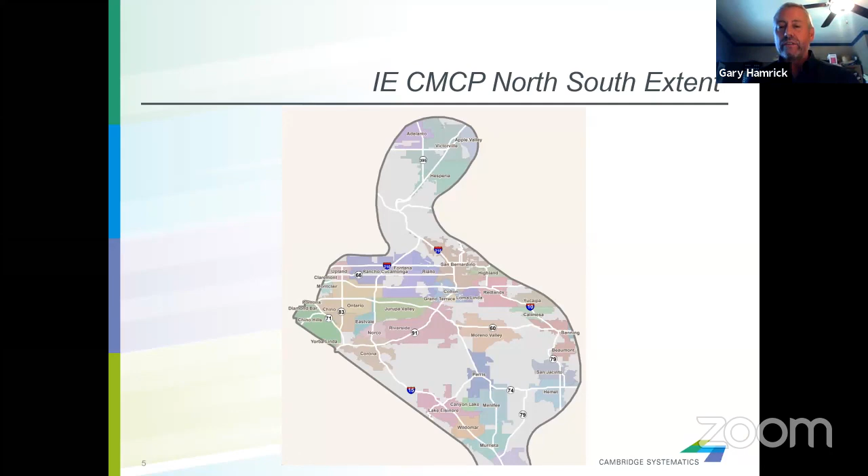So when we originally envisioned this project, it was essentially, as Jillian said, all of the Inland Empire, excluding the Coachella Valley for the most part, and some other areas to the north. This is the original north-south extent. This is the original east-west extent.

As we got into looking at this in a technical level, we realized that these areas are so vast, the corridors are so long, and the issues are so specific to the local area that we really couldn't do a deep enough dive. So we went to 10 subcorridors. We have 5 north-south subcorridors and 5 east-west subcorridors.

So this is the same area, but we're breaking it down now into localized corridors where we can really talk about the issues of all of your cities, of the specific communities, of the specific freeways and arterials.

And we've named these corridors not by a freeway name. For example, the I-215 corridor, we've named it how people travel. So from one area in the Inland Empire to another area that people like to go from work to home, or they go to school in another area. We've identified sort of the trip patterns and how people want to get around.

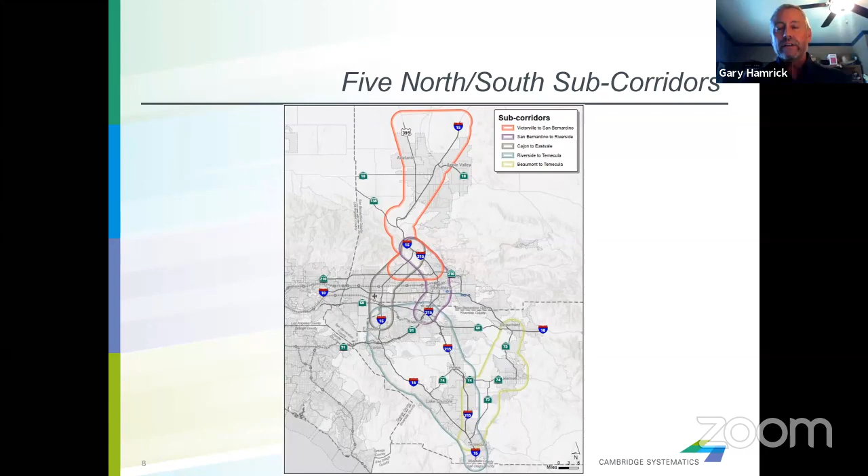Now, this is not being done in a vacuum where staff and consultants go in a back room and do some work. It's very important to have a robust stakeholder engagement process that's written into the CTC guidelines. So we did that. We had a project committee consisting of all the agencies here, including RCTC, of course.

And then in Riverside, we had a unique situation where RCTC had recently done the Reboot My Commute effort. And there's a tremendous amount of public feedback on what the public thinks about transportation issues, problems out there today, what kind of solutions they'd like to see. So rather than going out and giving them another survey and confusing them, we really utilized that information, which was fresh, good information about what the public thinks about transportation in Riverside.

For the technical analysis, this covers just some of the many different characteristics and data points that we looked at. So demographic and land use. What are the areas actually, what are the characteristics of these corridors? How do people move around? What are the trip characteristics? What kinds of trips, trip lengths?

Safety, where are the collisions occurring and where are concentrations of collisions? Active transportation, how can we improve biking and walking? And then of course, looking at freeway, arterial, transit, and freight. So again, the word multimodal is very important. This is not your old freeway plan where we simply look at what is the level of service on the freeway and do we add lanes. It's really about all modes.

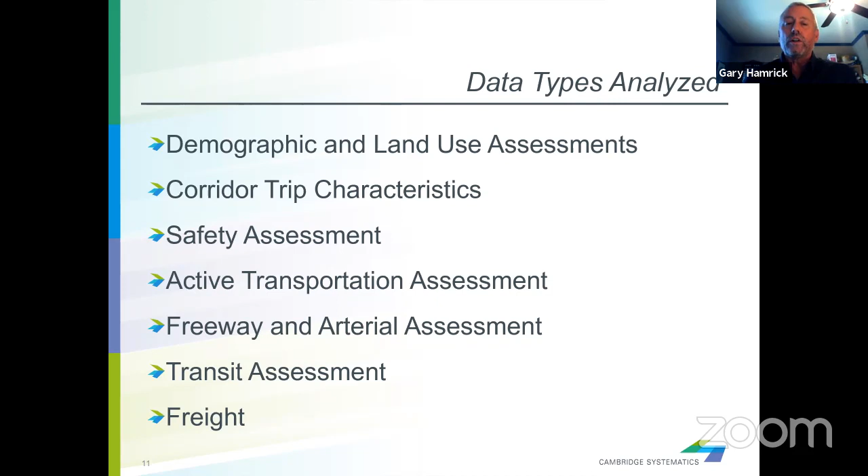Some of the data, just as an example, population density. Where you have more density, you have different issues associated with transportation and how people get around and make their trips. We analyze this for the entire region as well as the subcorridors. Without going into detail, you can see the red areas are the areas of higher population density, in this case a north-south corridor. We're finding along I-210, I-10, and SR91 concentrations of higher density, for example.

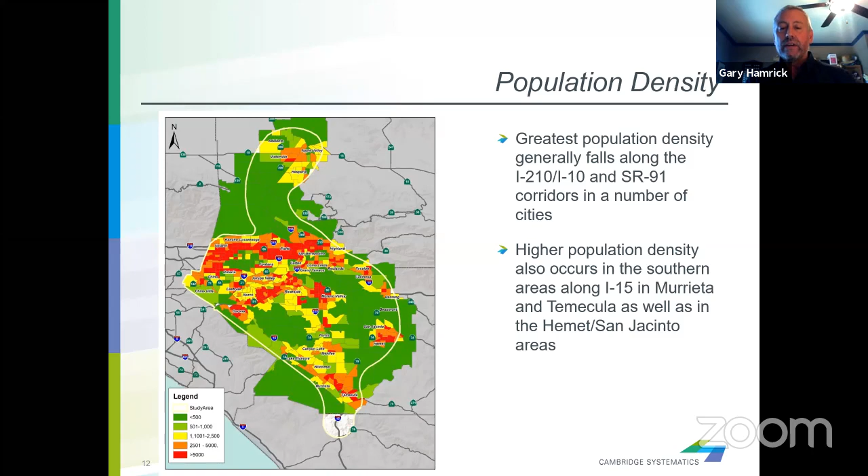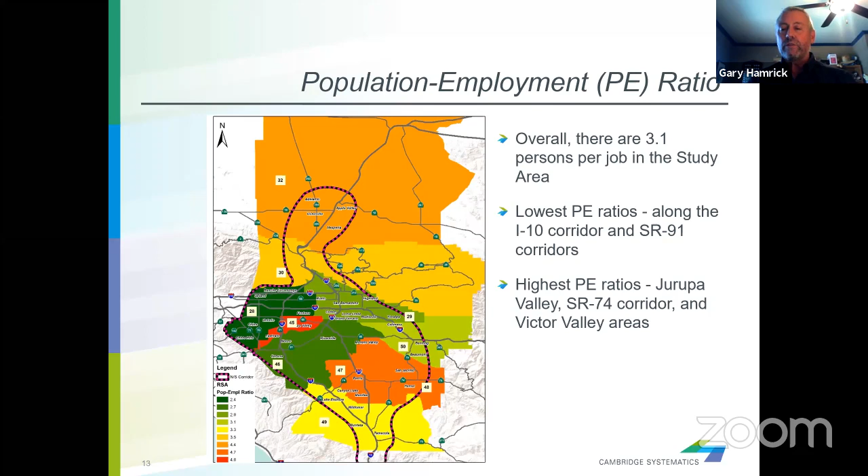Another way to look at it is population to employment ratio. So if you have a lot of people and fewer jobs, people are going to have to commute longer distances to get to their place of employment. And that directly relates to the kinds of improvements for transportation that we look at for each individual area.

I mentioned we looked at safety and collisions. We looked at each freeway and how it compares to the countywide average and the Caltrans District 8 average. We found that SR91 in both directions, I-215 southbound, and I-10 eastbound are the freeways with the highest collision rates. That directly relates to the kinds of improvements we want to look at for those freeways, not only to solve congestion but also to solve some of the safety issues where you see a lot of incidents occurring.

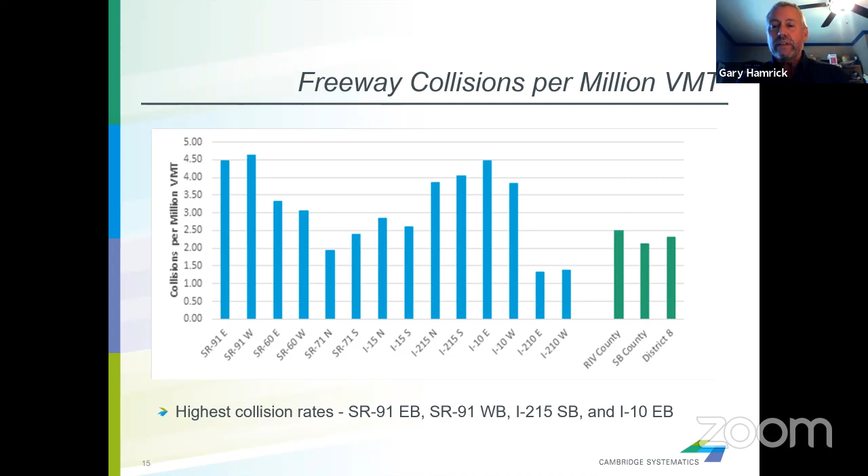So then we did a deeper dive down to the individual subcorridors, and here's some examples. This is one of them, and again, Beaumont to Temecula is this particular example. Every collision for the past three years was noted, its location and its type—did it involve a bicyclist, a pedestrian, a truck, or other collisions? So then we can focus on where these collisions are occurring and what kind of projects will help.

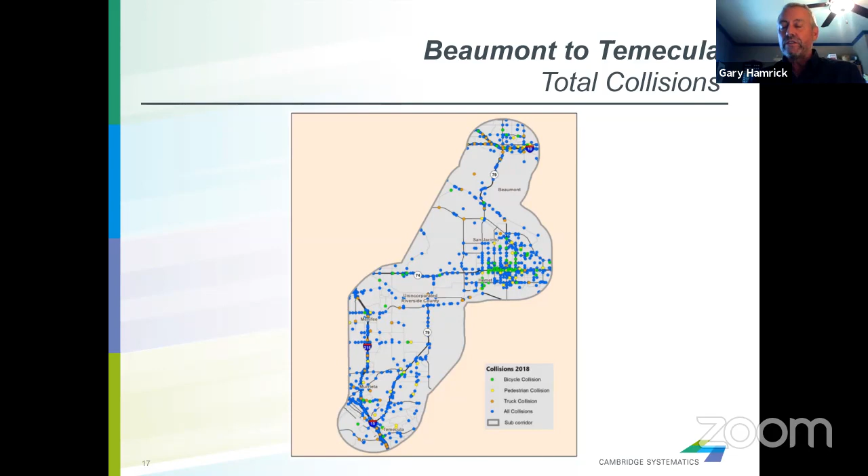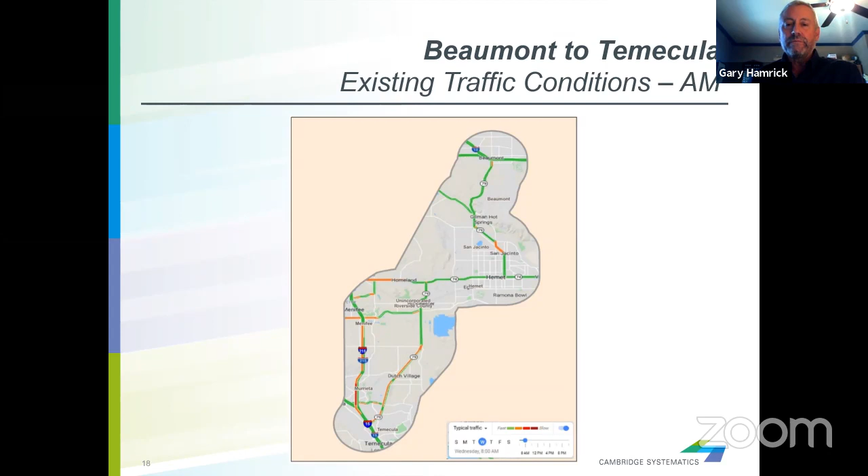We've also looked at traffic conditions. Of course, while the freeway is not the main component of a multimodal corridor plan, it's still very important—we recognize that. People are still doing a lot of their trips on the freeway system, and that will return after COVID. So we're looking at where the bottlenecks are occurring and what kinds of projects will be helping that. This is the AM, this is the PM.

So once we looked at all the corridors—their characteristics, how they're operating, and their problems with respect to transportation—we then gathered all of the recommended improvements from these sources, and probably ten more. Of interest to you in the county, we looked at the regional transportation plan, the guiding document for transportation, and the federal program for transportation projects potentially eligible for federal monies. We also looked at local programs: the RCTC long range study, recently completed, the Riverside COG active transportation plan, the RCTC 10-year highway delivery plan, and the traffic relief plan. You're familiar with all of these, but I wanted to make sure you understood that we didn't start from scratch—we're not looking at new priorities or new projects. We really built upon all of the work that the county has already done.

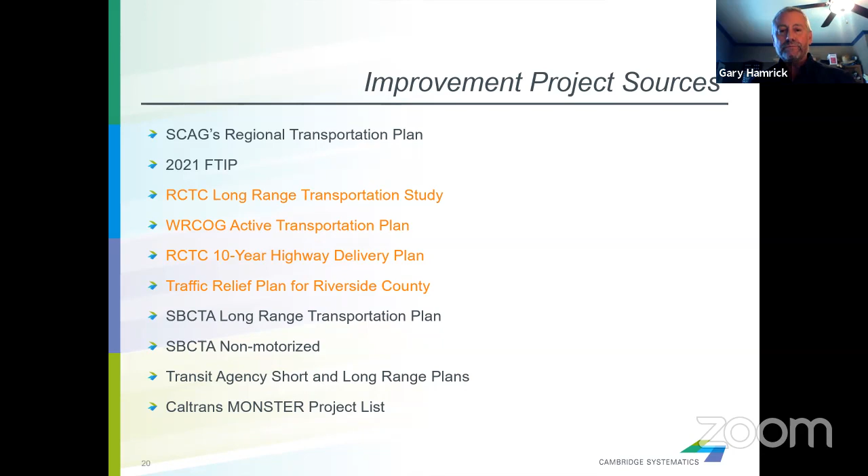Guiding principles are a very important part of this. We can't just go in and say we're going to have a bunch of projects to improve transportation. We have to say, what are the overall objectives for improving transportation and how people live?

So again, we went back to the local level—your long-range transportation study, which has specific visions, goals, and objectives. Those were directly brought into the project, as well as the San Bernardino County goals and objectives. There are very similar types of things at the state level, and even the federal level—in this case, the Caltrans Smart Mobility Framework. When you really look at these, many are the same, but there's certainly a very specific focus to how Riverside is looking at your goals and priorities for transportation improvements, and we made sure to take those into account.

In terms of project evaluation and the final project lists being published, we have over 420 roadway, freeway, and transit projects. All of your proposed express lanes projects, interchange improvements, auxiliary lanes, et cetera, transit projects, BRT, enhancements to Metrolink, enhancements to local transit, and in the area of active transportation, bike and ped, literally hundreds of active transportation projects.

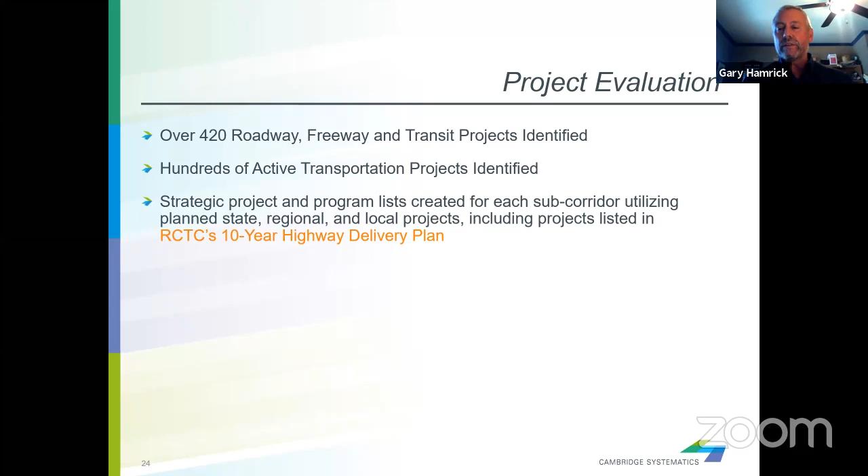So proposed new bikeways, both from local city plans all the way up to sub-regional plans. And as mentioned, we very importantly incorporated the 10-year highway delivery plan that you've done a lot of work on already. So that's a summary of the overall plan.

We kicked this off in July of 2019, started our project committees involving all the agencies that I mentioned at the beginning. We had our first draft earlier this year, and we're hopefully going to have our final draft in another week or so. Riverside is approving, San Bernardino is approving, and Caltrans as well. Once that document is finalized, you'll be eligible to go into cycle 3, when that comes around, to request money for specific projects for SB1.

I will stop there, and I'm very happy to answer any questions about the work that's been done.

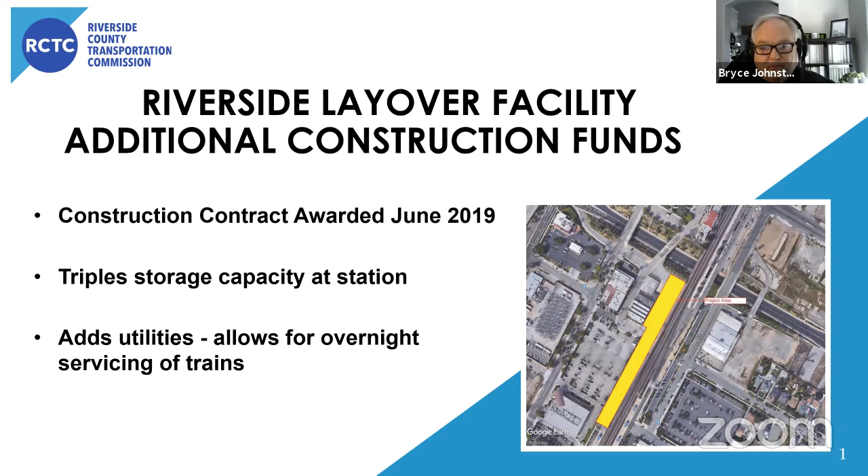The project is located in an old rail yard that's been there a long time, adjacent to the existing BNSF mainline track. The site also has numerous existing utilities impacting the project. During design, much of it was anticipated, but it's difficult to foresee all the complications that are in the ground.

The largest impact on the construction budget was the extensive hazardous materials encountered, which had to be removed and disposed of at a hazardous materials facility. This ended up being far greater than what the designers anticipated and what was in the hazardous materials report. This one change consumed a large part of the available contingency.

Another large impact was that as excavation proceeded, existing utility facilities were discovered that required redesigns of sewer facilities being installed as part of this project. The impact of these unforeseen in-ground issues resulted in those redesigns, and that's costly, since sewer lines just have to flow downhill, which isn't easy to design sometimes.

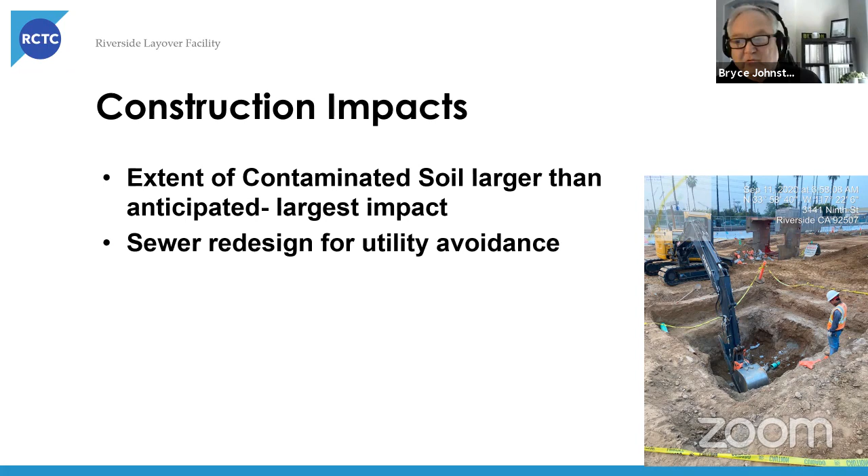Shown here are the contract amounts and the amounts we are requesting. The original bid was 4.4 million, and the contingency was about 10% of that, which for this size of project, being small in a complicated area, is just not sufficient. It's just not possible to anticipate all the issues we might encounter.

So we're requesting an additional $455,000 in construction funds to ensure we can complete the project, which is expected to be completed in April of 2021. This concludes my presentation, and I'm able to take any questions you might have.

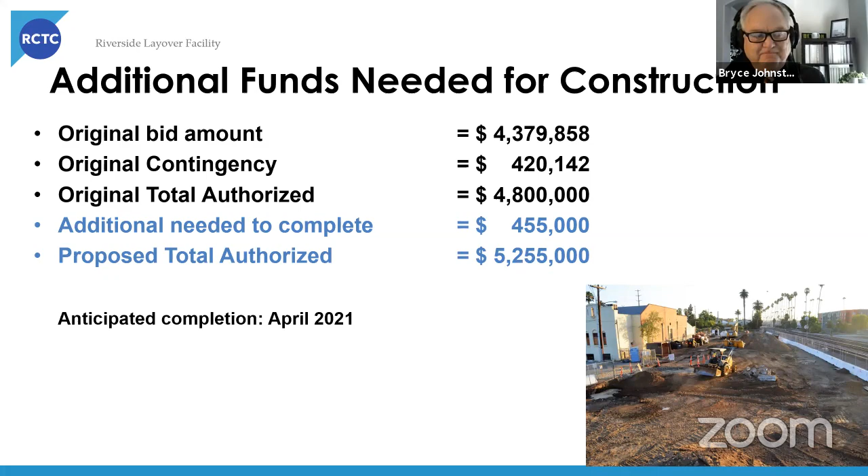Thank you, Bryce. Any commissioners have any questions or comments? Supervisor Hewitt, I'll ask a question, Mr. Chair. Okay, go ahead. Thank you.

Was there a soils report done at the beginning when we were doing the initial study and estimate on the project? Yes, when they do soil reports they take corings or borings, but you can only do so many, and then the designer has to extrapolate to estimate what they believe is there. I wasn't around when they did that report, but they did do it. They knew it was there; they just didn't anticipate the extent once you got further deep into the ground.

And what was the contamination? Diesel. There may be more than that, but that's the one I remember being said. Okay, thank you.

Anyone else? Yeah, I have my hand up. Supervisor Hewitt? Yeah, some of my questions were the same as Mayor Zimmerman's. Bryce, I'm sure you've got the numbers right on top of your head - how many additional cubic yards was it?

And was it hauled up close to Bakersfield where most of the stuff goes? I actually don't have the cubic yards on top of my head, I'll have to look that up and do that comparison, but I will respond to that.

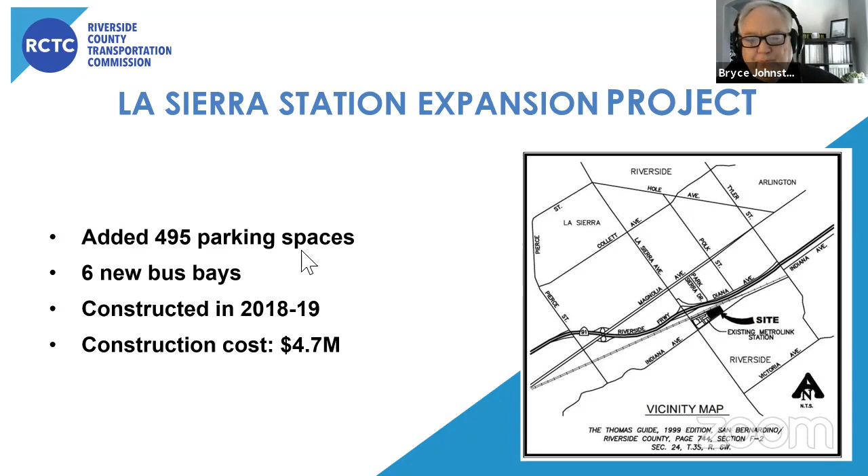The effort to close out the project was a bit difficult. There were numerous design changes and clarifications during construction and a permit issue with the city that extended the final contract acceptance with the contractor.

The work was completed in the field, but the difficulty was arriving at an agreed compensation with the contractor. RCTC staff and the construction management firm S2 Engineering worked at length to evaluate numerous claims, but eventually we did get all parties to agree to final compensation. It just took some time.

The effort to get to this point did require additional construction management services to investigate certain aspects of the claims, as well as closing out this last permit with the city of Riverside. Next slide.

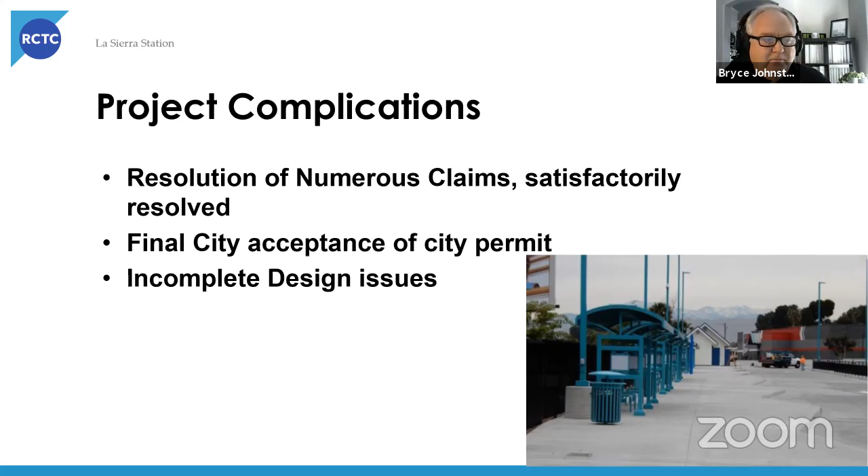Thus, we are requesting an additional $102,069 for construction management services. This total proposed compensation of $940,469 will result in about a 20% support to capital expenditure ratio. This 20% ratio is very much in line for small projects, especially those that have had numerous complications.

When we are able to make this final payment, this will close all aspects of the construction phase of this project. And that is my presentation, and I'll be willing to answer any questions.

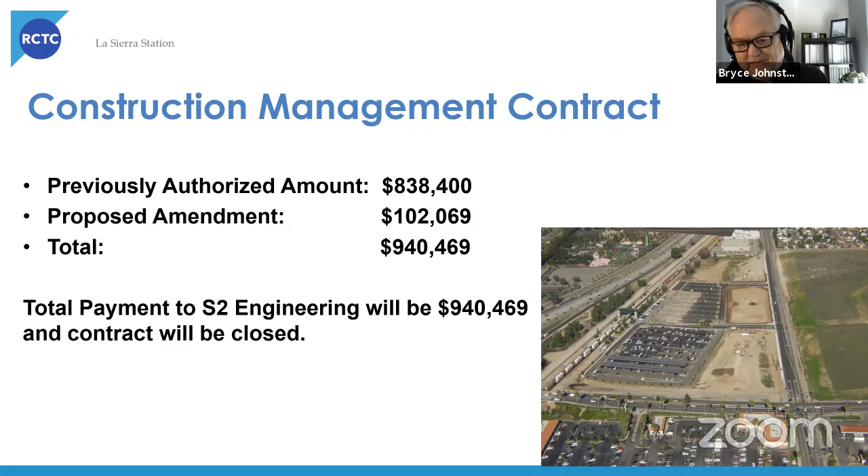Thank you, Bryce. Any commissioners have any questions or comments? Yeah, just a quick question. Bryce, was this basically just, we had some claims and stuff, but was it kind of the cost of doing the white glove test at the end to get everybody on the same page?

When I hired on to RCTC, we were about midway or more than midway through the project. And when I came on, the project had gone through 2 design firms, and it was switched to WSP, who closed it out for us. We did have quite a few electrical change orders.

Sometimes the scoping of the changes and what was needed involved a lot of back and forth, like with closed circuit TV, trying to get the technology right for what the transit wanted, what the station wanted, and what the city wanted.

There was one issue where it appeared previous work done in an adjacent area somehow was damaged, possibly not by us, but those are the disputes we have to work out in the field. So the contractor claimed over $100,000, but we resolved at less than 50% of that. There was a lot of gray area, but we all did come to a good agreed price.

So the main difference was 2 cooks instead of 1 on those designs, but we got it done. All right, thanks. Anybody else?